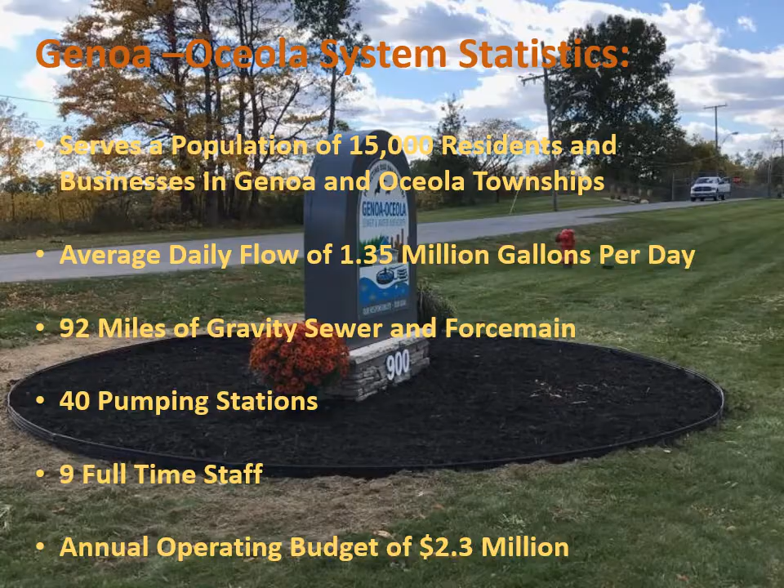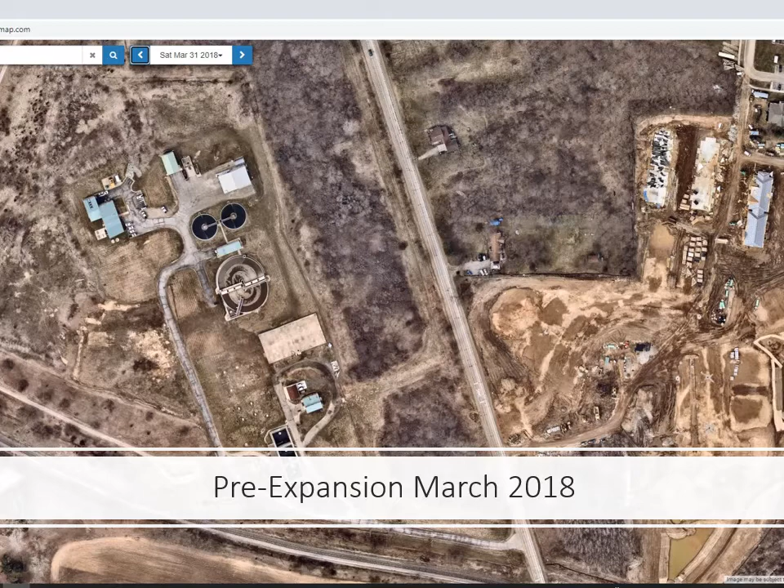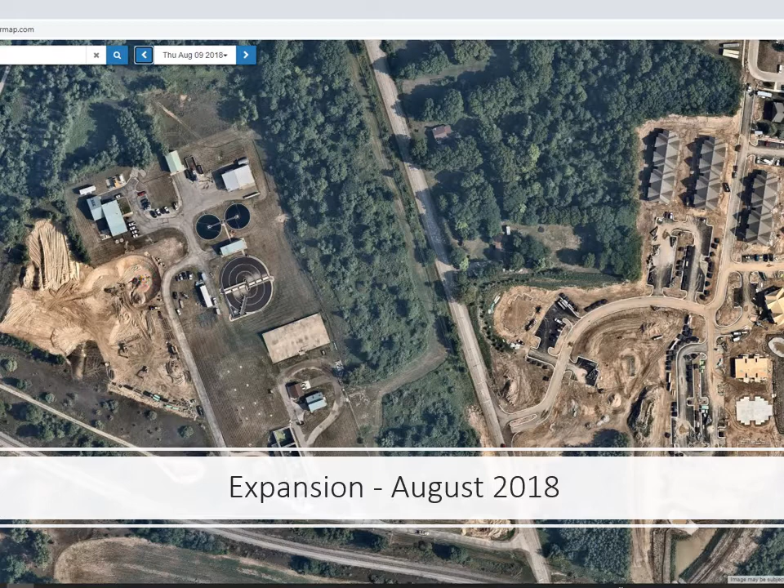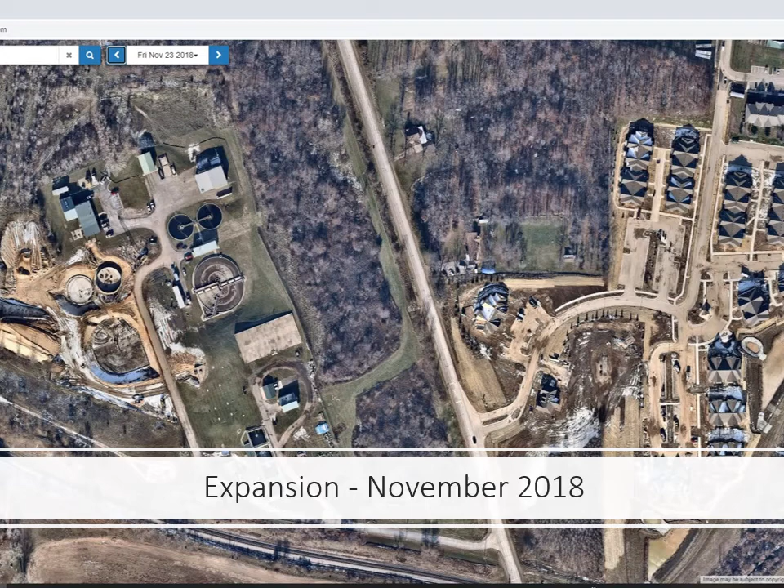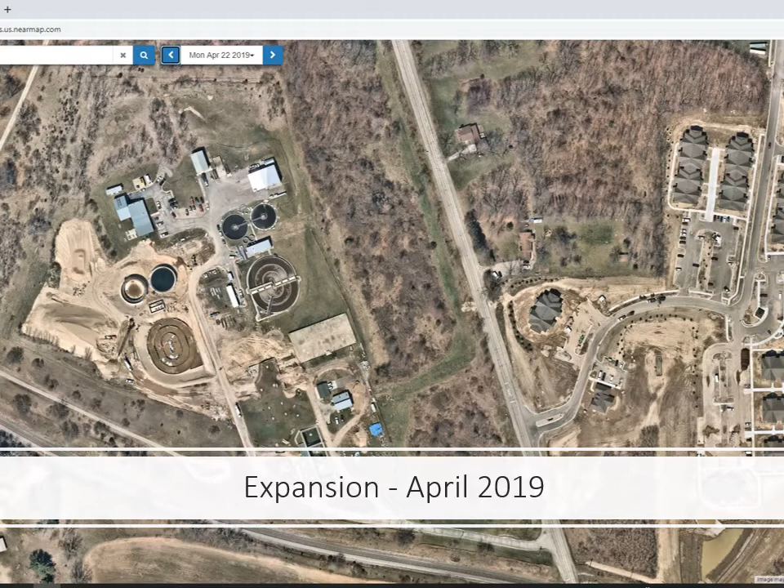And this other sludge storage tank was going to be repurposed as an equalization tank to contain a significant set volume of water through our plant process. As everything at this facility is pumped here, it's important to have continuous flows equally going to the oxidation ditch rather than surges from the pump stations operating periodically.

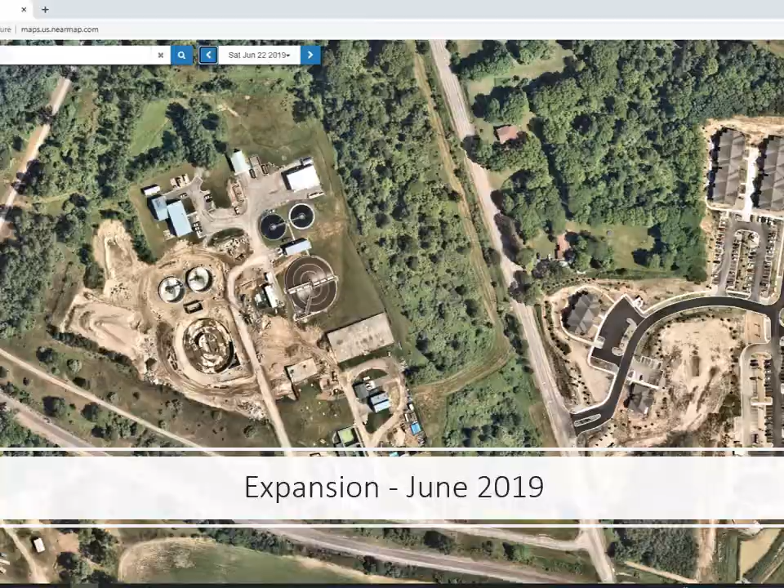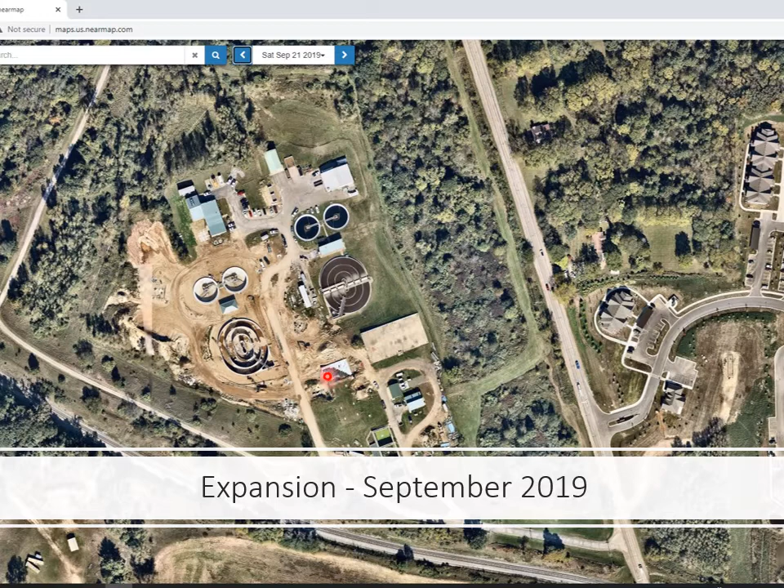In September of 2019, you can see the skimmer arms and scraper arms going into the final effluent clarifiers. The RAS building is fully constructed. All of the walls are fully poured and installed, and the catwalk is going over the oxidation ditch. You can also see that they began waterproofing the roof of the flow split structure at this time as well.

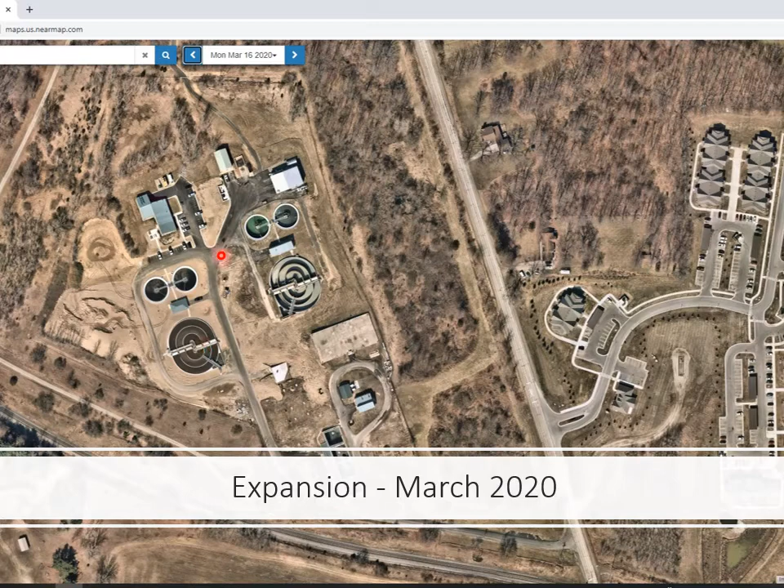And finally, our final completion now with grass fully restored and everything in operation. You can see in this particular photo that the oxidation ditch is fully operational, as are the final effluent clarifiers. And in the old plant, you can see we've emptied out the final effluent clarifiers. And these trucks here are actually painting the old steel and stuff from the old plant as we begin the rehabilitation process of the old oxidation ditch at the plant.

So let's go through the process of the Genoa-Oceola wastewater treatment plant. Historically, the very first phase of this plant was these three sequencing batch reactors that were constructed in 1988. This was originally a groundwater discharge facility and used SBRs in order to get full nitrification and denitrification for discharge to groundwater.

In 1991, another SBR tank was added on due to growth in the area requiring additional capacity. In 2000, the headworks building, additional sludge storage, and this particular plant were constructed to serve higher demands in the area. Also, as a result of water softener usage in the area, we had a significant sodium and chloride plume in the groundwater created from discharge of wastewater to the local grounds and then getting into the aquifer that was used for drinking water. As a result, we also added a building here to provide tertiary treatment and pumps to pump it back uphill and go to the Marion-Genoa drain, which is a tributary of the Shiawassee River.

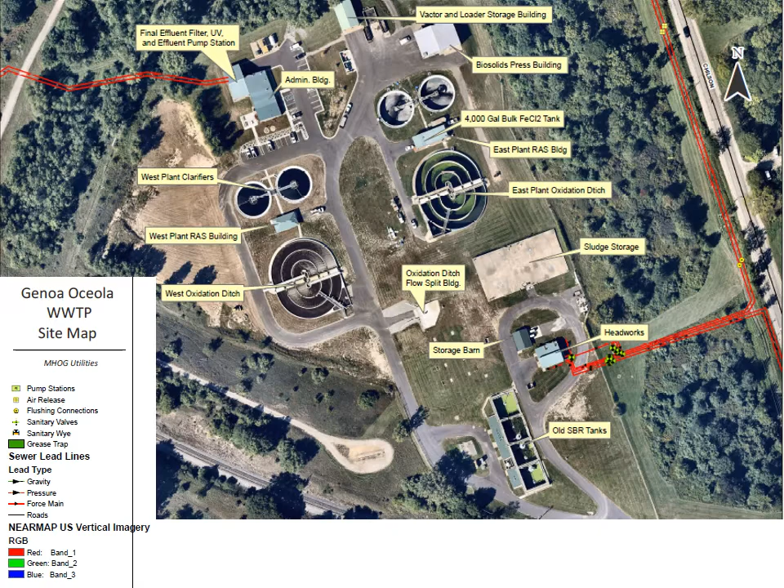This is critical for us as our plant uses pump stations, and so by the time the majority of material gets to us, it has been pretty well ground up and homogenized. So by capturing this, it keeps a lot of grit and debris out of our oxidation ditch process and allows it to run cleaner throughout the entire plant.

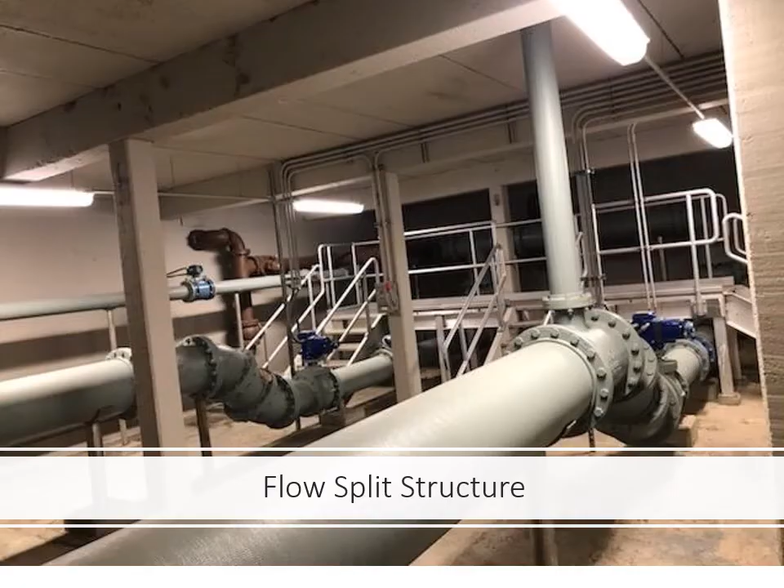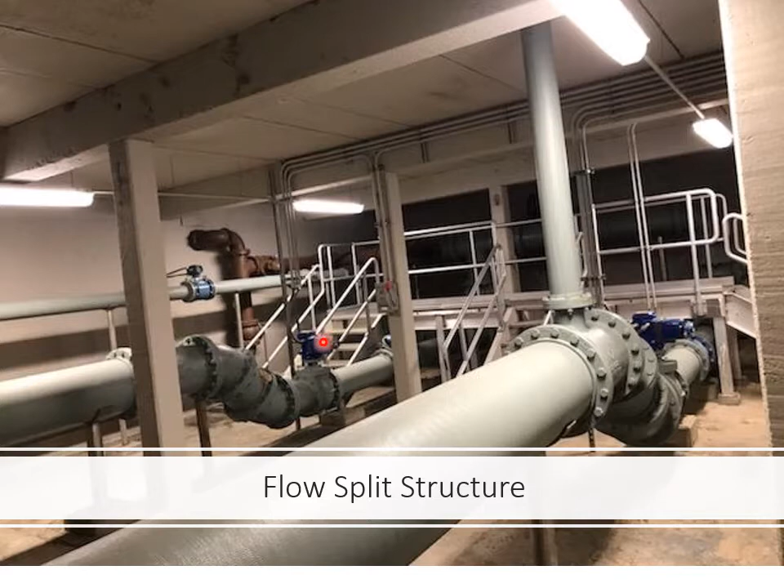Following screening, we go into our flow split structure. As you can see, this was a repurposed sludge storage tank, so we still have the columns and such in the precast concrete structure. There's 2 pipes, one for each oxidation ditch, coming out of the other old sludge storage tanks, and it's now used for equalization. We have 2 flow meters on here, mag meters, and then by having this elevation increase in pipe, it allows us to maintain surcharge, so the mag meters are effective in measuring flow. And then we also have 2 throttling actuated valves here that work to equilibrate the flow between the 2 oxidation ditches.

Following the flow split, the wastewater influent is mixed with return activated sludge in a selector tank. The selector tank works very effectively to allow us to do biological nutrient removal for phosphorus. By using this selector basin, rarely do we have to add any ferric chloride chemical or alum in order to precipitate phosphorus. We're able to use the natural biology of the organisms in order to remove phosphorus from our waste stream, saving us both chemical costs as well as providing a better quality effluent by not having acidic ferric chloride added to the waste stream.

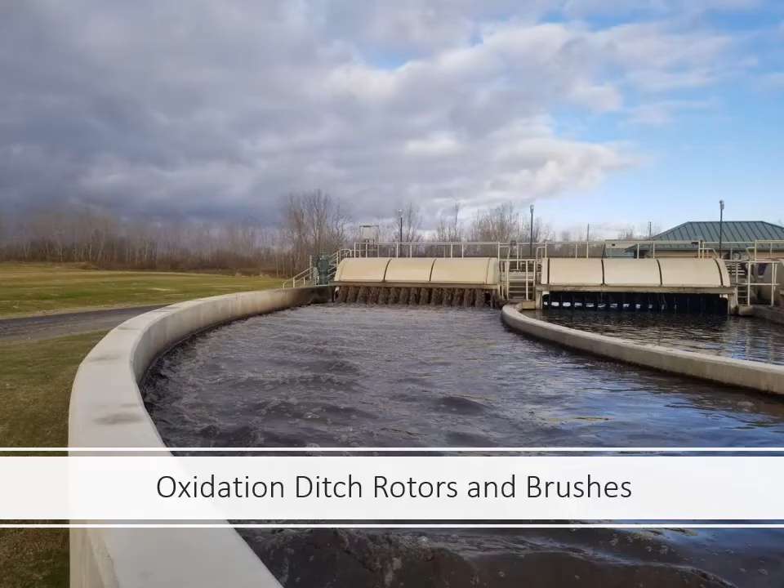This is a closer view of our oxidation ditch rotors and brushes and discs. By using this technology of oxidation ditch, it's a very efficient means electrically in order to get good mixing and aeration of your waste stream. It works much better than traditional blower-based diffusers and coarse bubble diffusers in wastewater.

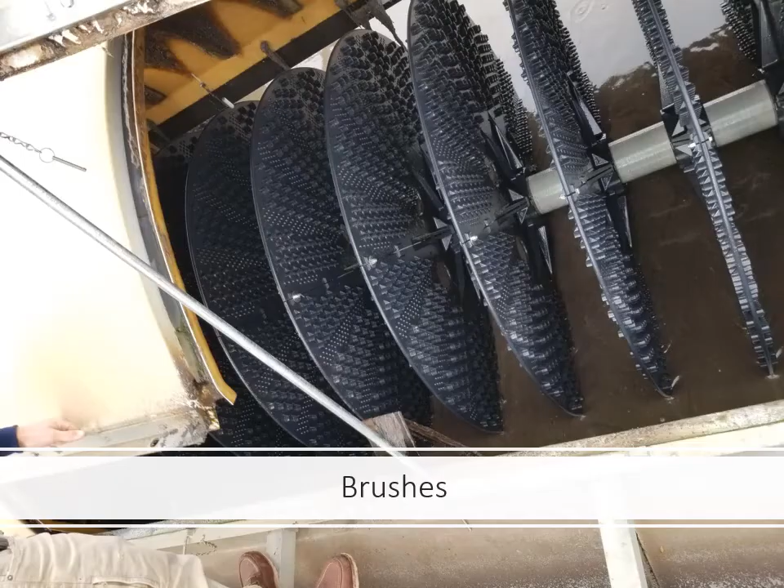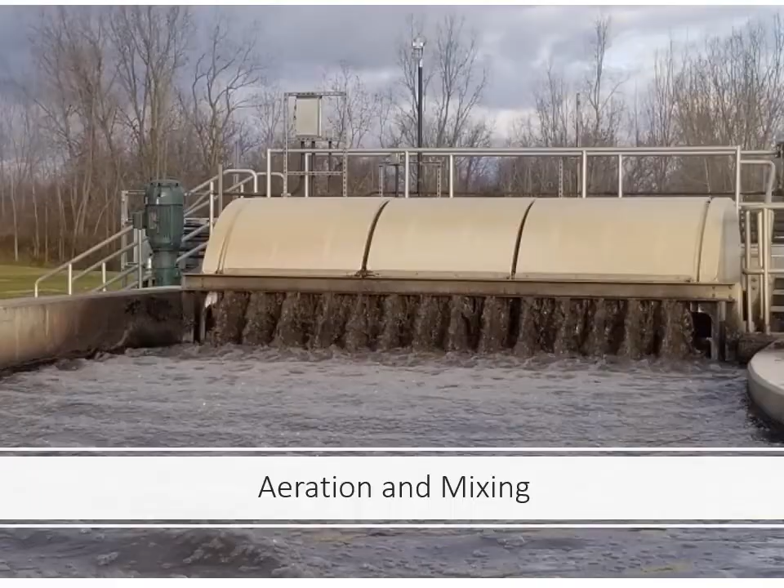This is a close-up view of the oxidation ditch brushes or rotors. And you can see from this they have a shape of a diagonal triangle that works to trap air and also move the water. And then there's also dimples in here that actually create air bubbles that get transposed in the water as these go around. So with all these discs located on one shaft, one single motor can provide a lot of horsepower for mixing as well as getting good oxygen transfer into the activated sludge process. And this is just another close-up of this showing how violent and how good the aeration is coming out of the backside of an oxidation ditch rotor shaft with brushes.

Following the oxidation ditch treatment, we go into our two final effluent clarifiers. Both these clarifiers have scum arms or scraper arms on the top that will go into a scum baffle. This water is then brought back to the headworks of the plant for treatment, and this removes any of the grease and floating material still in the wastewater.

At the bottom of the clarifier, the pumps pull this off and periodically waste some activated sludge for us to maintain our biological population based on the time of the year and nutrient strength, as well as continually return and mix with the raw wastewater to help in a biological nutrient removal process.

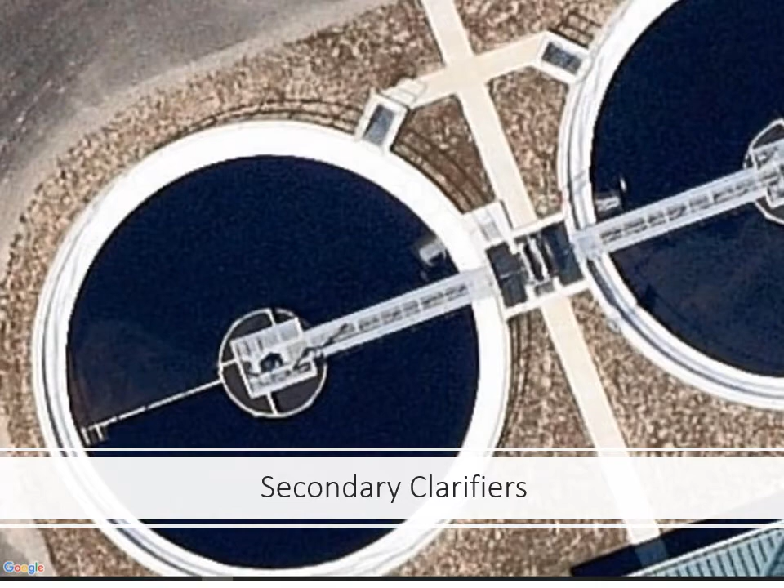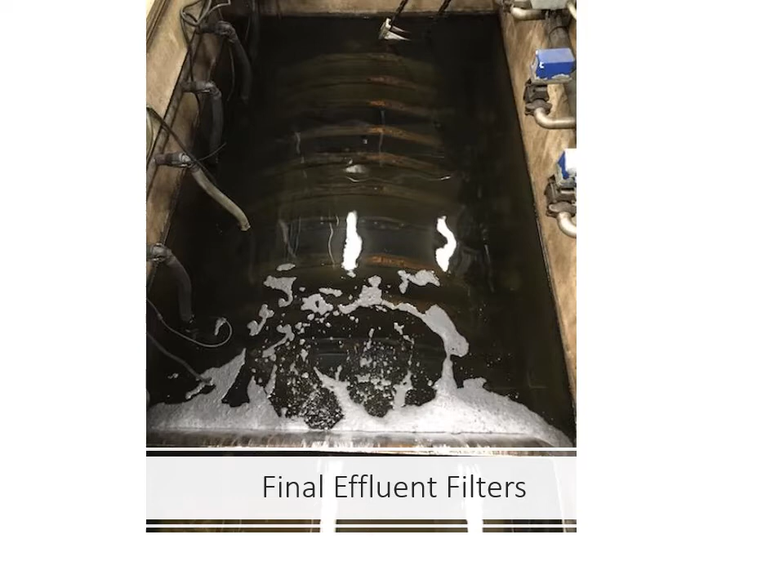Following the final effluent clarifiers, we then go to our final effluent filters. These are Aqua-Aerobics disc filtration systems. There are pumps located on each of these discs that will pull and vacuum off debris as it accumulates based on the water level rise in this chamber.

And you can see here we also provide some additional aeration prior to going into the receiving stream, as we have a dissolved oxygen limit on our water. And this helps scrub any remaining phosphorus particles from the waste stream.

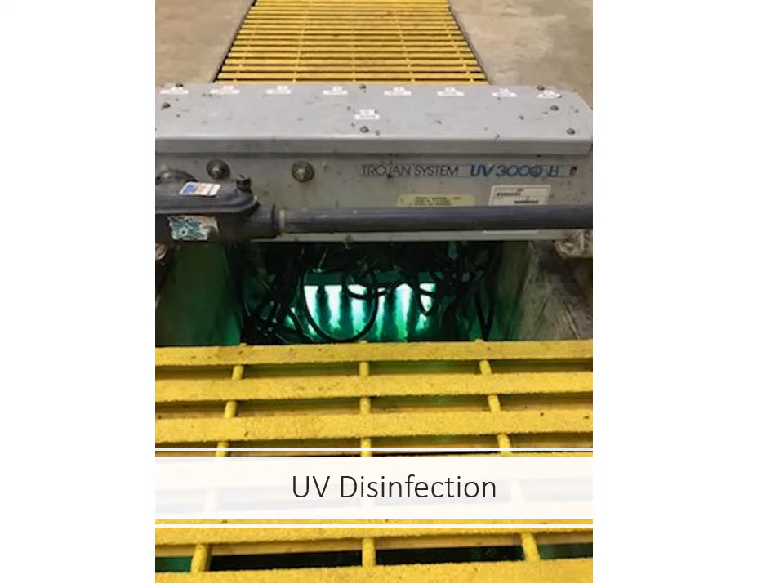Following final effluent filtration, we then go through UV disinfection, and following UV disinfection, we go into a final effluent pump station. It's a triplex pump station with an 18-inch diameter force main leaving it to transport the wastewater to a final stage, which is the river outfall, where it goes into the Marion Howell drain, again, a tributary of the Shiawassee River.

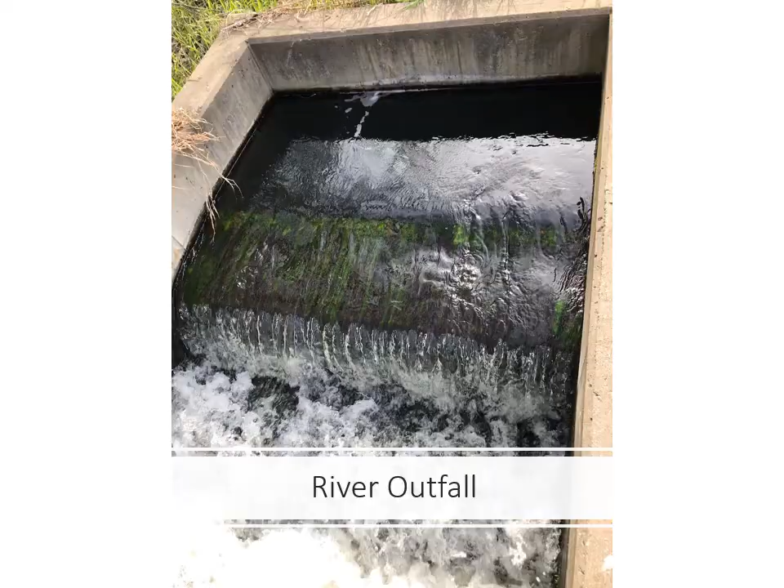And again, this is a cascading outfall, to provide aeration for improving the biota in the receiving stream. And you can see how very proud we are of the quality and cleanliness of our water entering the receiving stream.

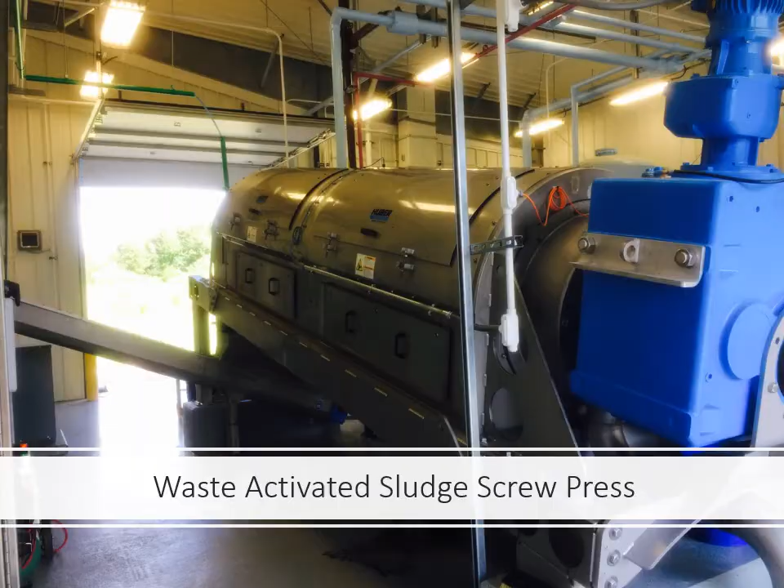Our residuals are managed through a screw press. This is a Huber screw press, and we take our waste activated sludge and process essentially what we waste every day through this screw press. And you can see here, this is a conveyor that takes the pressed sludge outside and into dumpsters where it's ultimately disposed of in a landfill.

And you can see here we put this plexiglass over this so the operators could observe and make sure that the conveyors are working properly and transporting the pressed sludge outside.

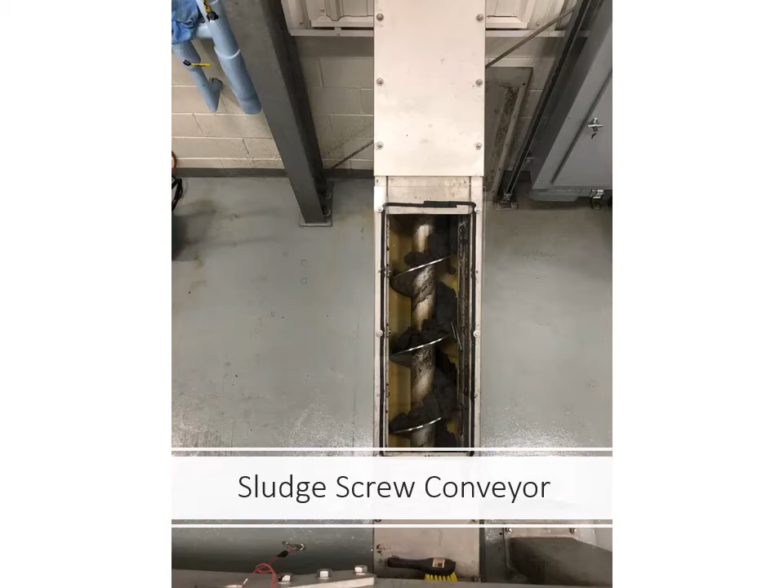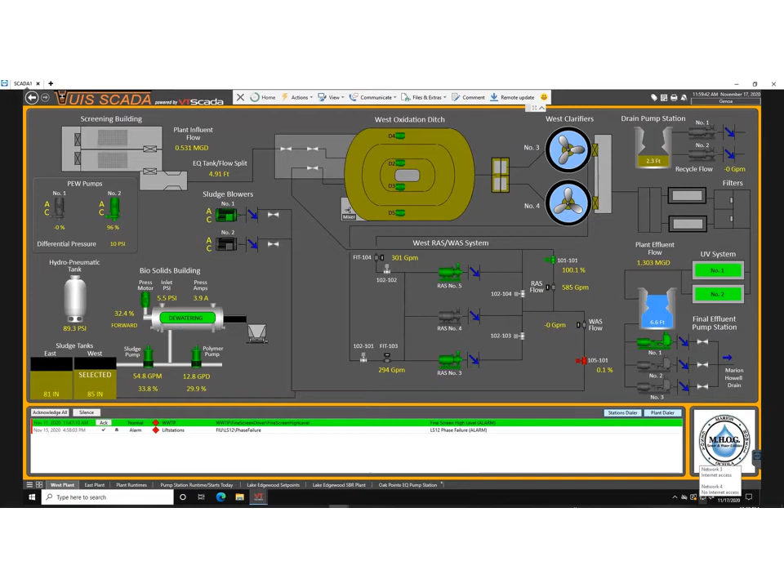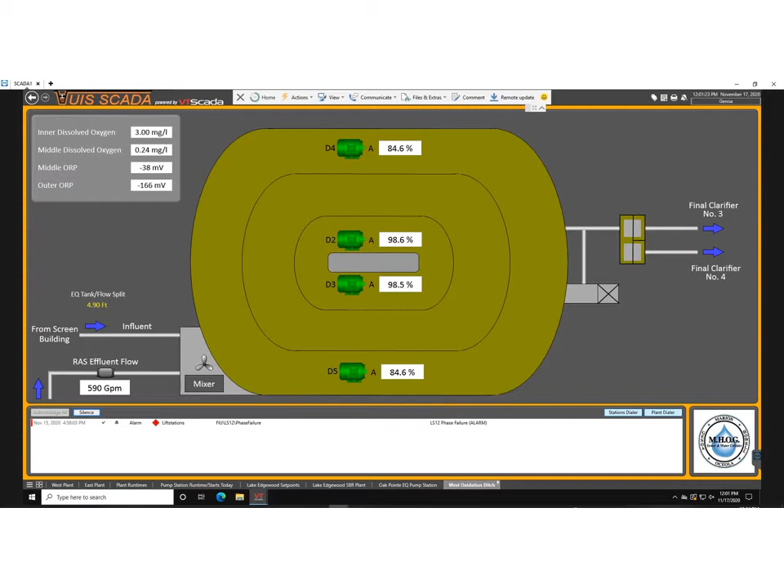This just shows the biological nutrient removal. You can see by manipulating the dissolved oxygen and the oxidation reduction potential, we can aid in the biological nutrient removal. So we try to keep our anaerobic zone in our outer ditch here. This is where we have a lot of facultative treatment of the BOD. As we move in, we get to a high level to provide our nitrifiers the oxygen they need to break down the ammonia to nitrate, so the ammonia is no longer a nutrient in the receiving stream.

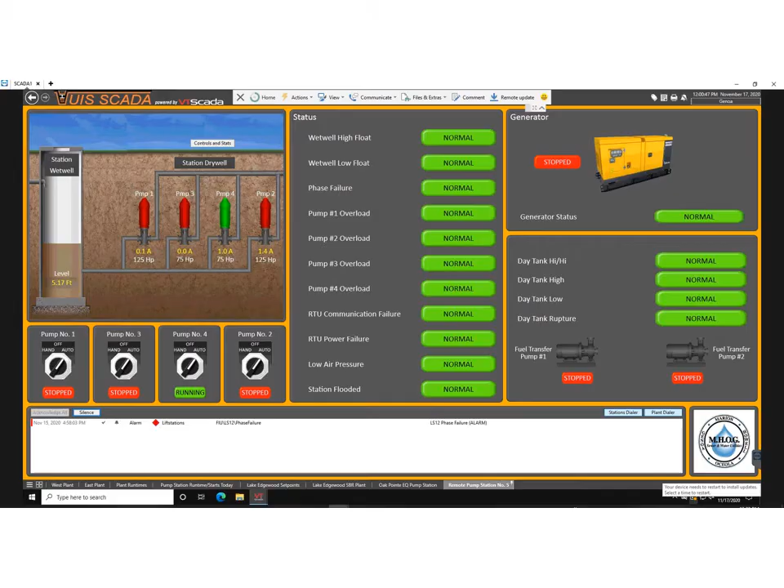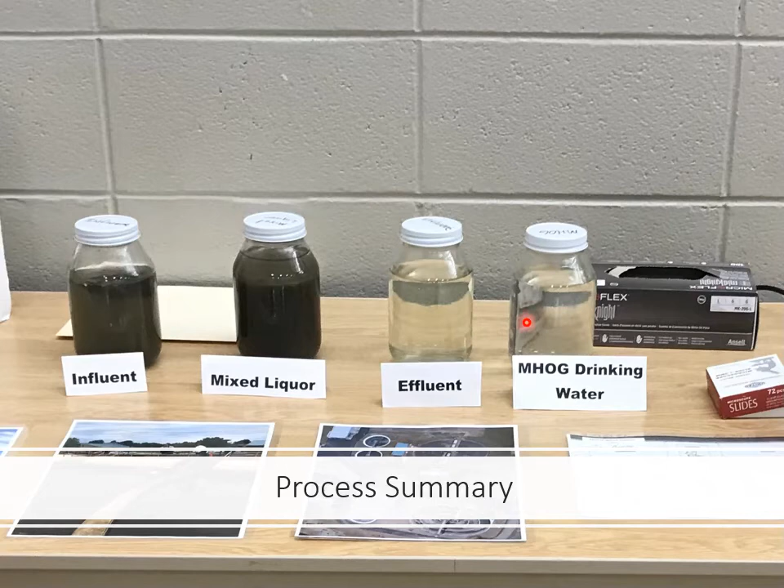This is just a little thing we like to show to school kids when we tour, and this just takes you through our process. So you can see this is our influent. Again, you have the mixed liquor. This is the quality of the effluent leaving, and for demonstration purposes, we always like to show that compared to drinking water to show essentially how clean the drinking water is relative to our effluent.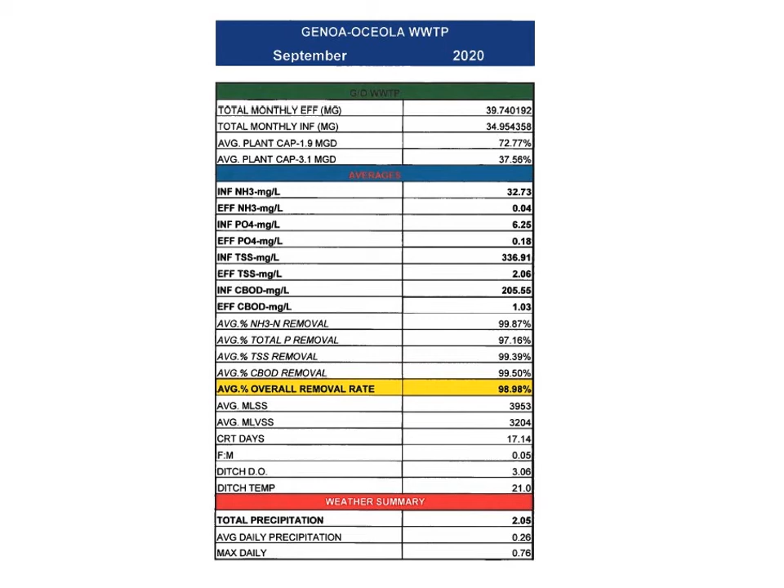So wastewater has done a great deal. It's probably been one of the largest public health improvements in our country, in addition to clean drinking water. And that's where environmental engineers and civil engineers have been so critical in improving the health and welfare of our citizens. However, with wastewater, we will have some future challenges facing us.

Some of the things that are being looked at now are removing prescription medications from effluent streams, as we're finding that some prescriptions are interfering with larval and fish reproduction as a result of hormones and stuff that are going into the receiving stream. Microplastics, especially microbeads from cosmetics, are becoming a big problem as they're accumulating in the Great Lakes and coming together, creating oxygen depleted areas for fish.

Recalcitrant compounds such as PFAS are unable to be removed by our traditional biological treatment processes. And so we're going to have to work toward the future of finding ways in order to treat these and remove these from the waste stream as they often become concentrated in the wastewater treatment plant effluent.